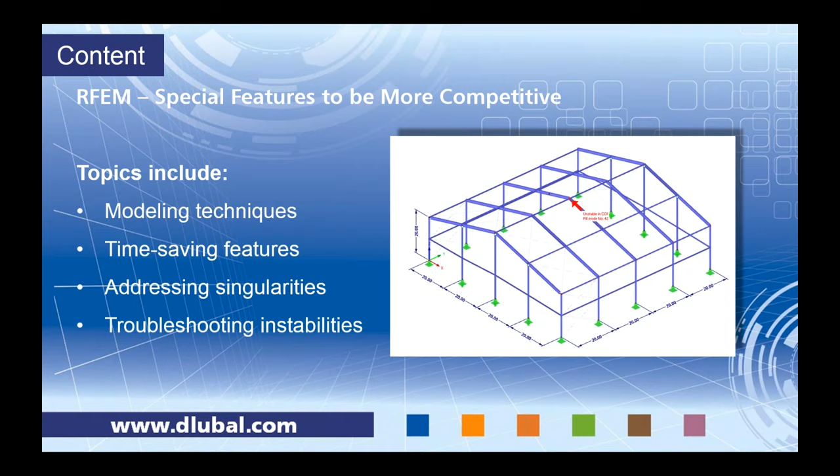I don't think there's a single engineer out there who has modeled that hasn't encountered an instability of some sort. So today I just want to show you some features in RFEM that I think help you troubleshoot these instabilities and to overcome them quickly.

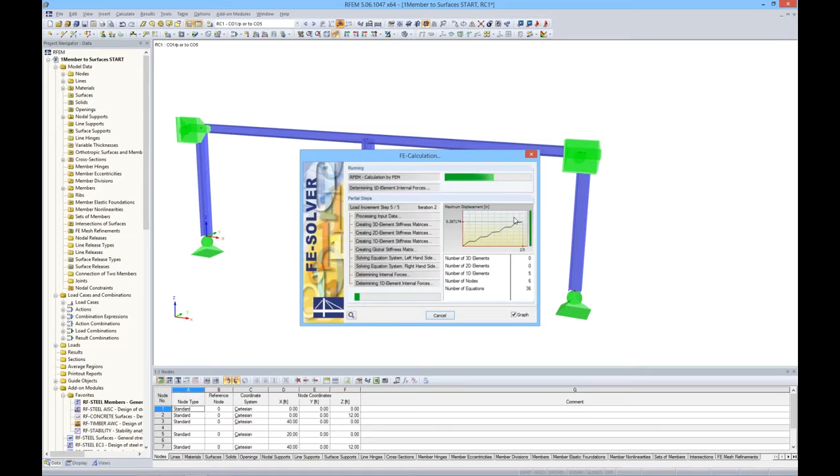So with this result combination, I want to go ahead and run an analysis. And it tells me that the results are not found, so it's going to go ahead and run through all of those load combinations. And if I take a look now, I have a results option down here at the bottom of my Project Navigator tab. So this is where I can actually control what I see graphically from my results. You can see here that right now I have my moments in the local Y direction displayed.

We have a max and a min, and I can scroll through all of my load combinations here, and it updates according to which load combination was shown. I can increase my member diagrams here just so you can see them a little more clearly. And we can take a look at our axial forces.

Maybe we want to take a look at shears. We have stresses here. The other thing I utilize in this model is we have, as I mentioned, quite a few add-on modules. So we have one called RF Steel Members, and essentially it's just a stress analysis of our steel members.

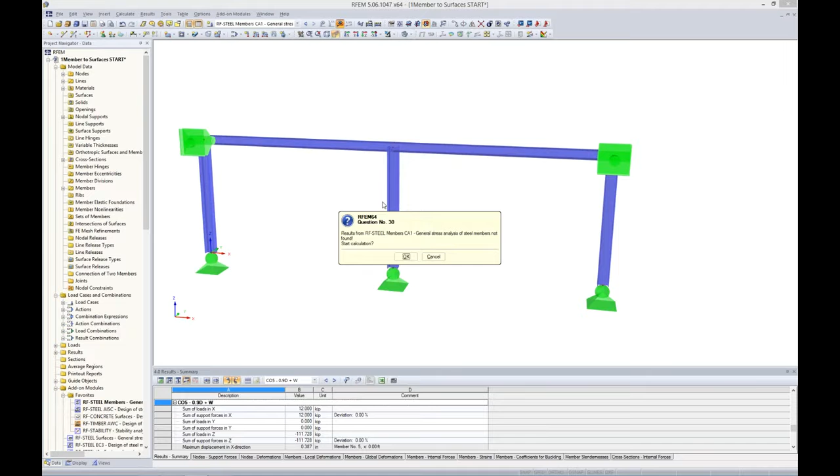I'm using the results from our result combination to get a stress ratio. You can see here that if I take a look at my colored panel list, my ratio is actually 1.11 at this intersection. So for design purposes, this obviously is not okay. We can't have over 1.0, and in some cases maybe it's 0.8, it's 0.9. You can see the rest of the beam is relatively okay, even at these other column locations at 0.75.

If I decrease my member diagram, we can really see clearly where the problem area is. It's right at this intersection. So we have a couple options here. We can certainly increase the size of our members, but this can result in an over-conservative design because the only problem area is really this intersection here.

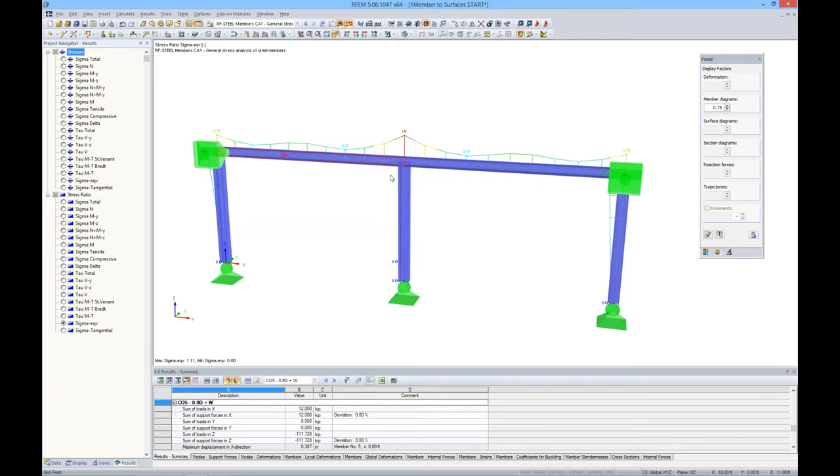So what I'm going to propose is that we maybe take a more detailed look at our intersection here with a finite element analysis. If I go into our wireframe view and turn off my results, we can see here that our members are just simply 1D elements. When you're drawing a member in the program, it will only be this line, which is the centroid of the section, as a 1D element.

I want to go ahead and divide this member here. So all I need to do is right click on the member, go to divide member, and I have a few options here, but I want to divide by the distance. You'll notice this arrow here is going from left to right, so we know where the start and end of our beam is. So I want to divide the member 2 feet from the end, and I hit OK. Now you can see that I have 2 separate members.

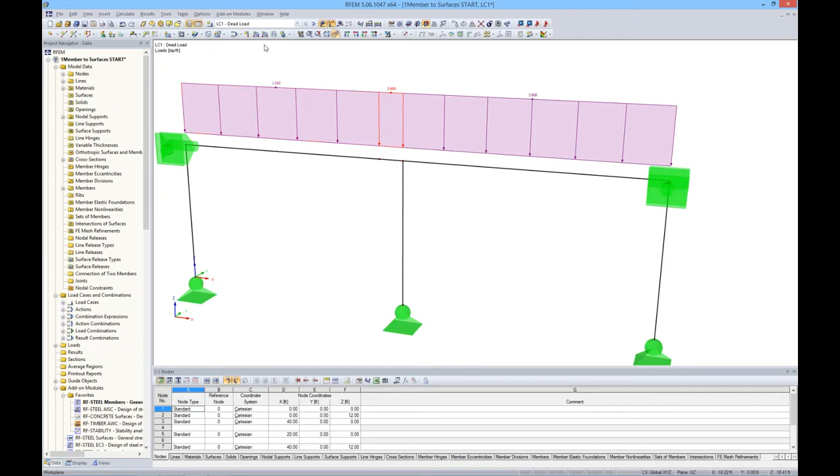And you might be thinking, okay, well what about the loads? What happens with the loads when you divide a member like this? But you can see that the loads were also divided, and the program's smart enough to know to keep that value on the divided member as well.

So we want to do the same thing with this one. I will divide the member by end distance. This time, because my arrow is going the other way, from start to end, I want to divide it from the member start by 2 feet. If I select this column and simply hit the enter key, the last dialog box will come up. So that's just a quick tip rather than right-clicking on the member to pull up the dialog box again.

And we want to go ahead. Now we have these 3 separate members right here. So I'm going to render it again, and I'm going to select these, and the selection is just similar to AutoCAD. If I drag from left to right, it will only grab what's in that box. If I go from right to left, it will grab everything that box touches.

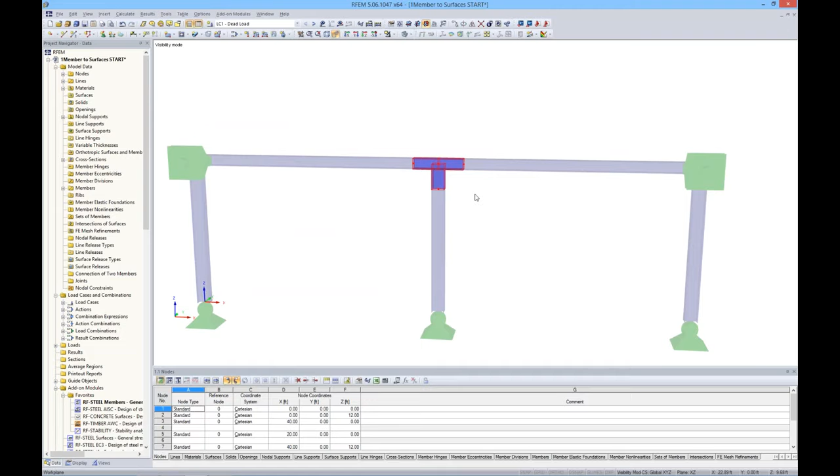So for this case, I'm just going to select here, and I'm going to choose visibility by selected objects. Now I can no longer select anything other than these 3 elements that I specified before. This is a pretty powerful feature that RFEM has that I haven't seen too often. If I select my 1D members, right click, and go to my member, I can generate surfaces from members. And now you can see, let me put it in the wireframe view, that these 1D elements are now surfaces.

So they're 2D elements now. If I click on the web for this surface, you'll notice the thickness is 0.38, steel A992. All of this is taken directly from the section that you specified, the W shape. If I select a flange down here, the thickness is 0.63 inches. So again, everything was taken from that W shape.

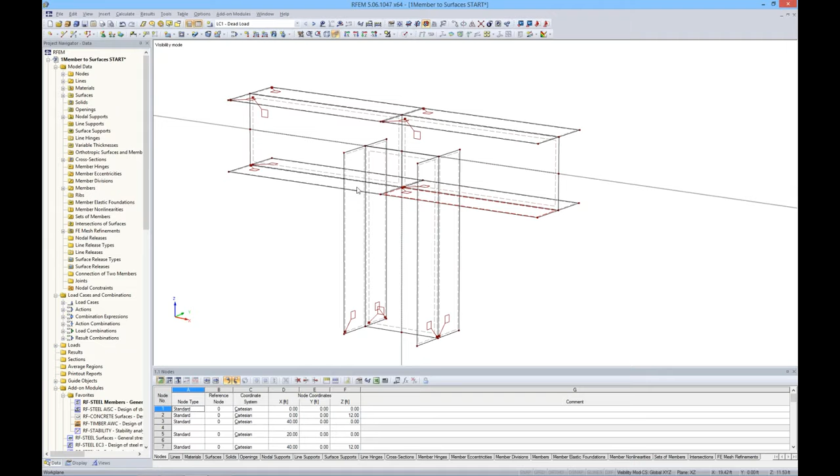So you might notice here that we have some geometry issues. Obviously, this is not valid. So we want to move the flanges of the column to the bottom flange of the beam. I'm just going to hold down my control button and select all of these nodes at once.

And I'm going to use our move copy tool. I don't want any copies here, I'm just going to be moving. Typically I would need to know what this distance is to move these flanges down to the bottom flange of the beam. Maybe after a little while I could decide, okay, half the depth, take into account the thickness of the flange.

But instead, RFEM has this tool where we can select 2 points to actually get a displacement vector. So if I select from the top of the flange down to the bottom of this flange, you can see I now have a displacement vector in dx and dz. We will not be moving it in the dx direction, but only in the dz. So I hit OK, and you'll notice that everything lines up quite nice.

Now, the other thing to consider is that we have this single point here where this 1D element is framing into the surface. This can actually cause a singularity. All of these forces are being transferred to this one particular point right here rather than being distributed over this entire surface. So actually what I want to do here is to create a rigid plate at the end.

For our surfaces, if you go up to this button up here, you'll notice that we have quite a few shapes that you can choose from. So we have donuts, semicircles, triangles, anything really that you'd like to do, polygons, and the program will create this surface element and automatically mesh everything. So there's no need to individually mesh the elements. Some other programs require you to tie nodes together, to tie elements together, but the program will do this all automatically.

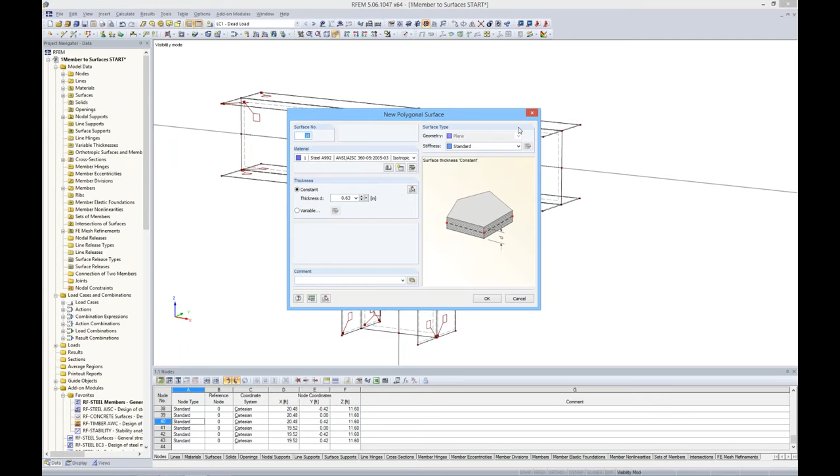So for this case, we're going to go ahead and choose polygon. And for my stiffness, I'm going to choose rigid. Everything's grayed out because our stiffness is super high. So here we will just go ahead and draw our plate. And once we close the loop, we can see that we have a new element here.

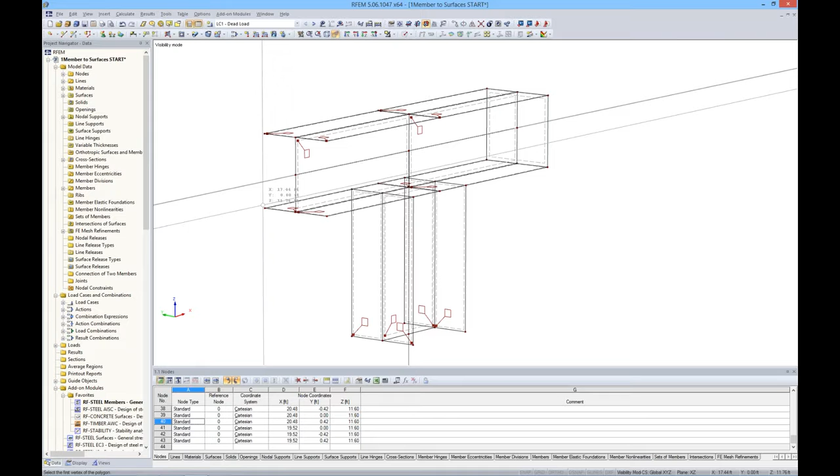We will do the same for this side. And lastly, we want to do the same on the bottom of the column. I right mouse click to get out of that dialog box. And you can see now that if I go ahead and render my views and turn off my visibility mode, that everything lines up quite nicely.

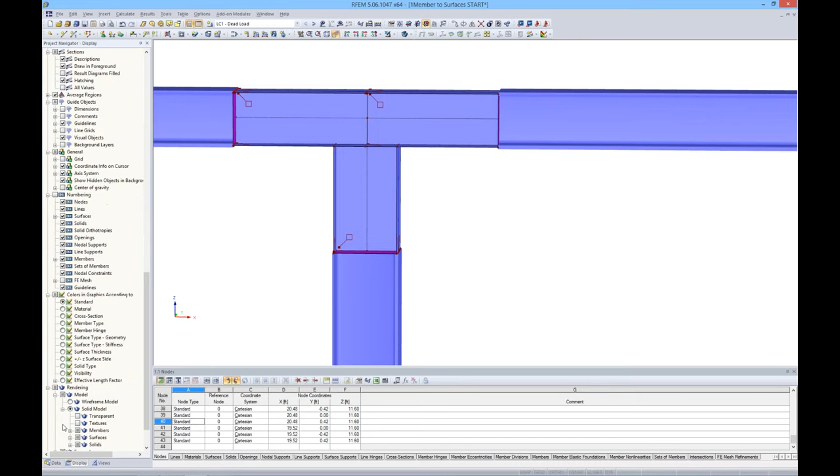Surfaces are only modeled at the center line of the thickness. So we do have the option in our display menu, and this display menu is essentially everything that you'll need to adjust your graphical view. If I scroll all the way down to the bottom, I have the choice for rendering here, the model, the solid model, surfaces, and I can actually fill including the thickness. And then if I zoom in, you can see that everything lines up with the 1D element to the surfaces.

I will go ahead and turn that off. And now the other thing I want to show you is the FE mesh. You can notice that the program has automatically inserted these refinements. For the sake of this purpose, I'm going to go back to our data and go ahead and delete these.

Now, if I go to calculate FE mesh settings, and I think most people are familiar with this with an FE analysis, that you have to specify your length of your finite elements. Default is typically 1 foot. If I go ahead and generate that 1 foot, we can see that this is clearly too large for this situation. We only have one FE element for the entire width of this surface here. So if we go to calculate FE mesh settings and change this to 0.1, regenerate the model, we can see that this is much better.

Again, the program is tying all nodes together, all lines, so you don't need to worry about that. Okay, so one last thing to consider is our loads.

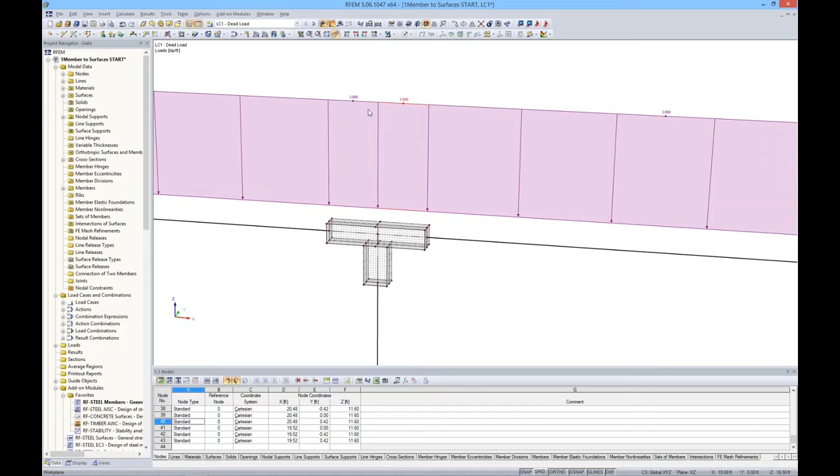For our dead load, as I mentioned before, we kept these two member loads, but in this case we don't have a member here anymore, we have a surface. So we need to delete these - I just click on the load and delete them - and I'll apply a line load instead. A line load is very similar to a member load, except it can be applied to surfaces, for instance.

So here we want to apply -3 kips per foot. I simply zoom in and click on my lines, and now you can see that the 3 kips per foot has been added.

I want to adjust my live load. If I hold down the delete key and click on each load, that will also delete those loads. Again, I want to draw a line element, and because I'm in live load up here, that is the load case this load will be generated into. For this one, I want to specify it as -2 kips per foot. Again, I just zoom in here, and we have our loads. Okay, so I believe we are ready to run our analysis.

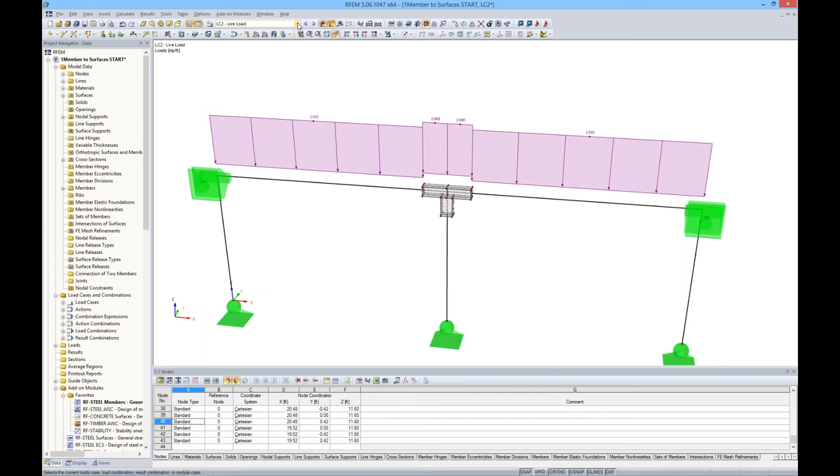I want to go to my result combination again, and I'm going ahead - it's asking if the results are not found, and up pops our dialog box. This will take slightly longer than our 1D elements because we now have the 2D surface elements. You'll notice it's simply going through each iteration as the load increment increases as well.

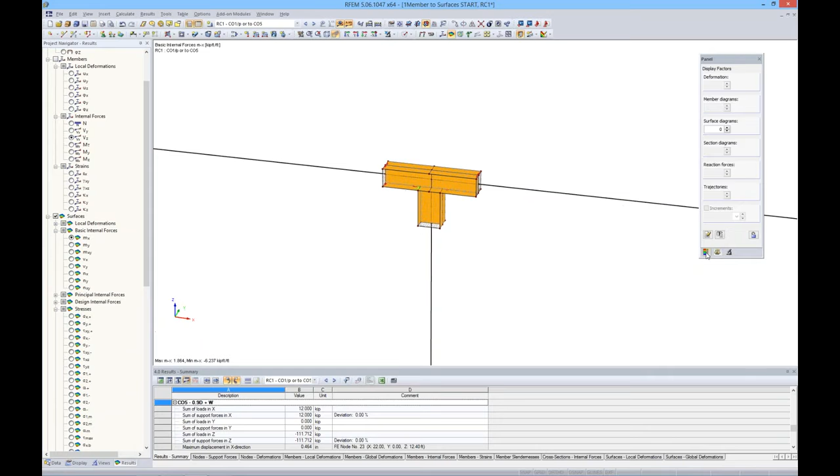So instead of the members, you'll notice that the member diagram stops short of those surface elements, which is fine. I'm going to turn that off, and I want to take a look at our surfaces. If I scroll in here, now I can view all of the different internal forces for the member - shears, moments, everything of the sort.

What I'm really interested in is the stresses, so I go ahead and view the von Mises stresses. Everything looks okay until I zoom into these points - we can still see that it's extremely overstressed.

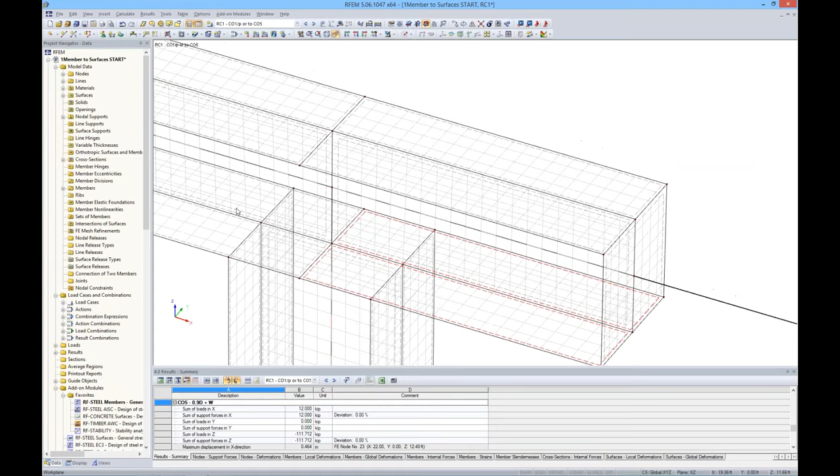So we have an option here where maybe we want to add a plate to this bottom flange, maybe an inch plate. If I turn off my results and hold down control, select this surface, I can select all of these bottom flanges. Now I can right click.

Oh, sorry, I lost it. Let me go ahead and do that again.

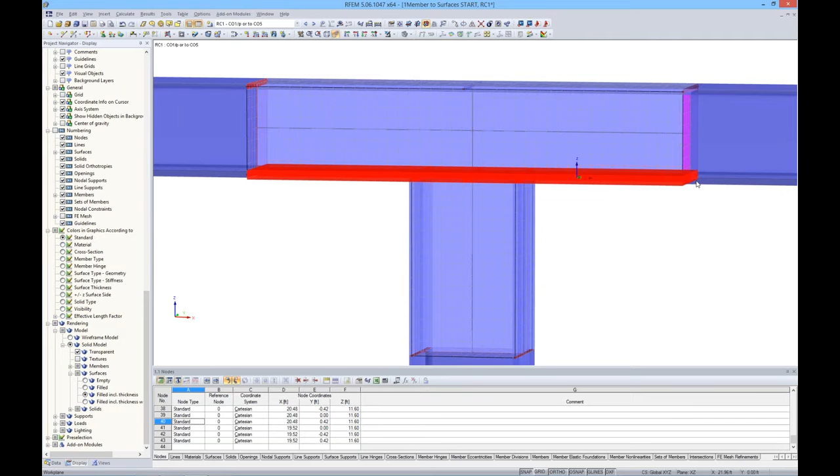Okay, now I can right click, edit surface, and let me increase my thickness to 1 inch. In the rendered view, we won't see that unless we change it to the thickness under our display options, and you'll see it's slightly thicker than our 1D element, which is exactly what we want. I'm going to change it back to here.

Now, the other option is to do a plastic analysis. With our add-on module, RF-MAT NL, which takes into account nonlinear materials, we can select all of these, right-click, edit our surface, and we want to create a new material.

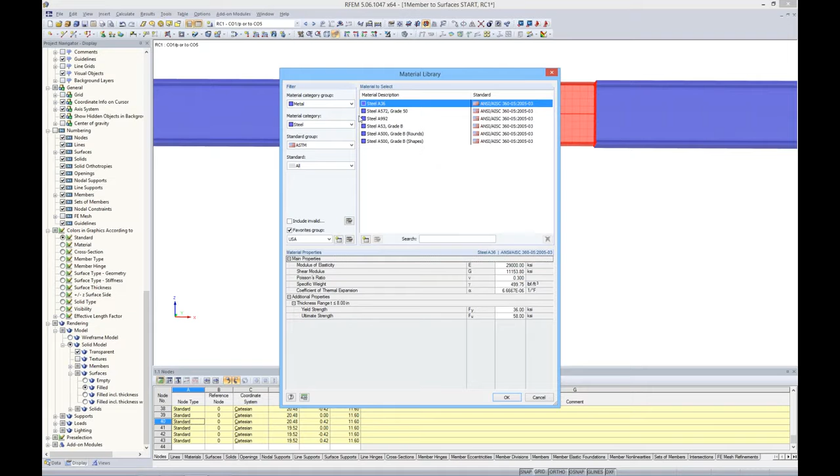So I go into my materials dialog box, and you can see the library is full of quite a few materials. We can filter them according to metal, steel, ASTM, but more importantly we have this favorites group option, where you can save the ones you use most often. For me, I created one for USA, and I'll use steel A992.

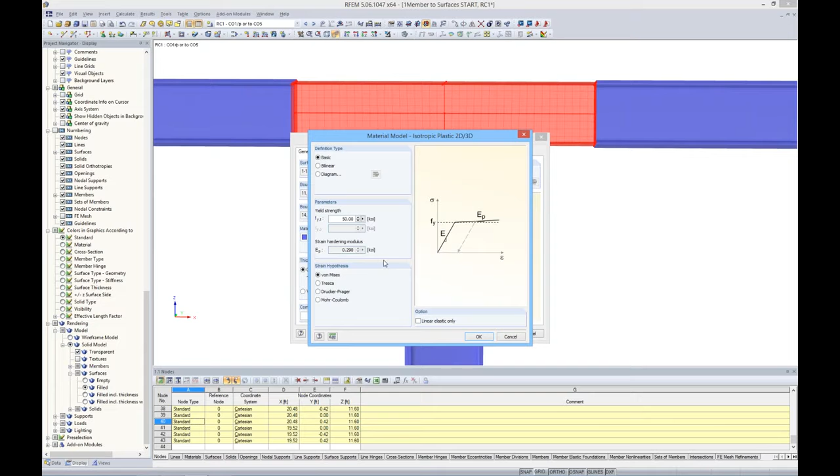Now, the material model default is isotropic linear elastic, but for this case I want to use isotropic plastic 2D, 3D. Up pops this other dialog box - you can see our stress strain diagram, our yield stress here at 50 KSI, which is automatically filled out, and our strain hardening modulus. So here I can click OK. Everything looks fine with that.

I hit OK, and I hit OK once more.

And I zoom out, and if you're not quite sure if the material is different than the rest of them, you'll notice here that I'm actually in my table down here, and I have this steel A992, which is isotropic linear elastic, and as I highlight the field in the table, the members themselves will actually highlight as well. This blue one just means that it's not being used currently. And then the steel A992, plastic 2D, 3D, you can see that those were actually applied to here.

Okay, so I want to go ahead and run my result combination again. And again, this will take slightly longer than the last one because now it's a nonlinear material. And keep into account the size of your mesh also matters for your finite element. At some point, the smaller mesh you go is not going to change your results. So what I would suggest is to keep a mesh that doesn't create a super long solve time, but will obviously give you the accurate results. You'll notice that if you decrease the mesh size and solve again, your results won't change by much.

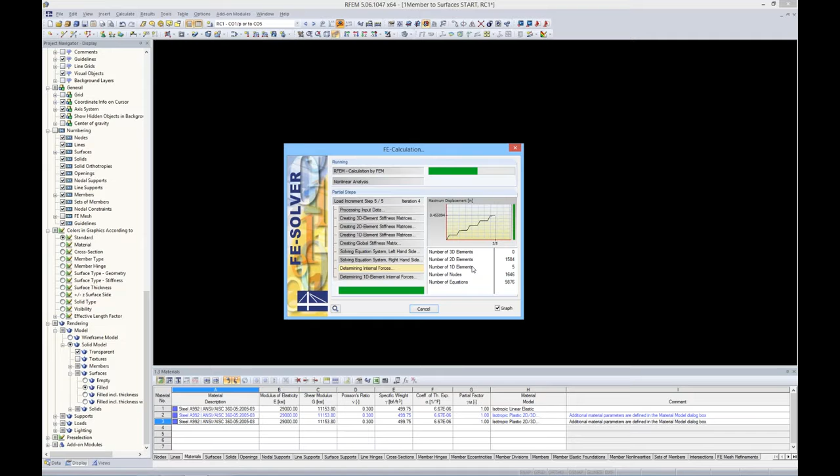We also have this graph here that shows the maximum displacement as the program is cycling through each iteration. So as soon as this is done solving here, which will be just a second longer, and again, it's just because we do have a nonlinear material. Now I want to take a look at these contours. Each FE element actually has a value at each corner. And what the program is doing is using a smoothing algorithm to tie all of those values together and to create a nice smooth diagram.

Under my display tool, and I scroll up here to my results, I actually want to choose constant on elements. Now what this is going to do is actually average out the 4 values for each FE element. Then you can take a look individually for each FE element. And you'll notice that nothing exceeds 50 KSI, which is our yield stress, which is exactly what we'd expect.

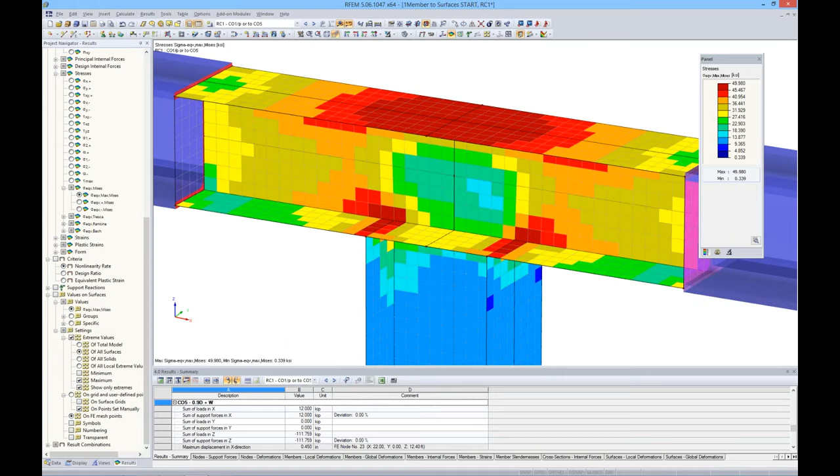I think an important thing to show you here is that we have an option under results called criteria. And this criteria will actually show us our FE elements that are in their full plastic state at 1.0. These other 2 green ones are obviously somewhere in between 0 and 1 as the ratio, and then the other elements have not reached that state yet. So that simply concludes our first example.

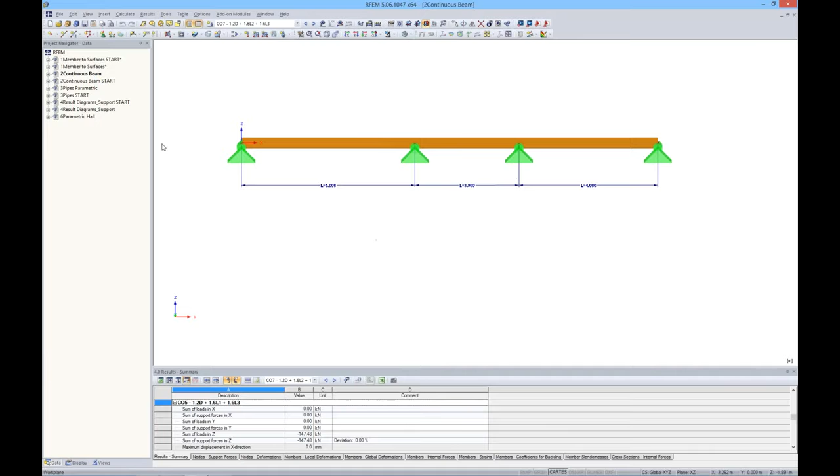I want to go ahead and move on to our next one, which again is very simple. It's just a continuous timber beam, 3 spans, nothing too special about it. But actually what's going on behind the scenes is quite powerful. And the purpose of this example is to actually show you the use of parameters or parametric modeling.

So if I go ahead and go to edit parameters, and I move this dialog box down, with parameters, you can actually define a variable in the program and then use these variables in an equation to change the span lengths, to change loads, to change angles. There's quite a few options, which if I show you here, we can change areas, angles, surface thicknesses. So I'll get into that in just a minute.

But if I go ahead and type in 2 meters here, and then for my B length, which would be my second span here, I'm going to go ahead and type in 5. And maybe for my C length, I'll go ahead and type in 3. I hit apply, and you'll notice that everything is updated. Supports moved, and I also want to show you that if I go ahead and look at my dead load, everything was adjusted with the loads as well. We have separate live loads on each of these spans, and those were all updated as well.

Now let's say I want to edit my live load to, let's say, -2 kilonewtons per meter. And I go ahead and hit apply. You'll notice that now the live load was updated. So you can understand the benefit of using parametric modeling for a company that maybe creates a lot of the same structures, but of course geometry is changing slightly, maybe some loads are changing slightly, but overall you can use the parametric modeling to deal with structures that are very similar to just improve your efficiency.

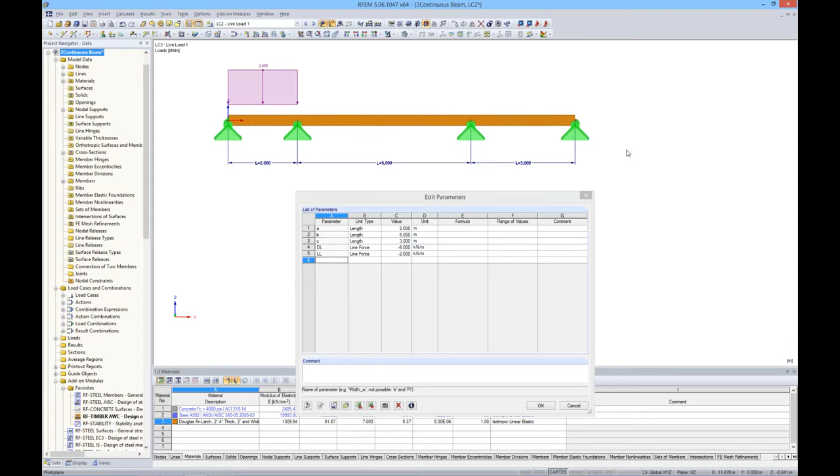Now, the other thing I wanted to show you is, again, I created quite a few load combinations from the ASCE 7. If I take a look at my result combination, it's asking me, do I want to go ahead and run the calculation? Yes. So this is just finding the max and mins of all those load combinations.

And now I want to take a look at my support reactions. You'll notice here that as I scroll through them, of course, my support reactions are changing according to the different loads that I have. Now, I want to show you guys our print report option, including these parameters. I think that RFEM has quite powerful print report options in comparison to a lot of other software that I've used in my design career.

If I go ahead and open up a printout report, and I created one previously shown here, a separate dialog box will actually open. You'll notice here on the left is our table of contents, or report navigator. I can click on these and our report will actually update according to where I am over here. Now the same goes for here. I can keep scrolling down and the table of contents will also update over here.

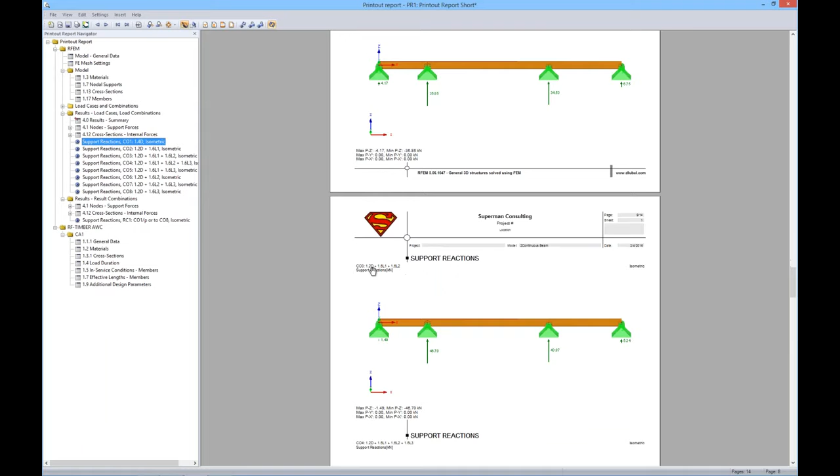And I went ahead and put in some pictures here of our support reactions. And you can see this is reflecting our spans that we currently have, which is 2, 5, and 3, I believe. And they're for each load combination. If I go ahead and zoom in here, I can see load combination 3, my support reactions, my max, my min. Everything has nice headings. It's very clear. But let's say, oh, okay, well, my beam just changed all of a sudden.

So I'm going to exit out of this print report. No, I don't want to save it. I'm going to open up my parameters, which down here in my table under my first model data tab is a quick link to my parameters. And let's say I want to do 5 meters, 2 meters, and 3 meters. I hit OK, and then you can see that everything was updated. Now, I want to go ahead and run the results again. And I go back to my print report.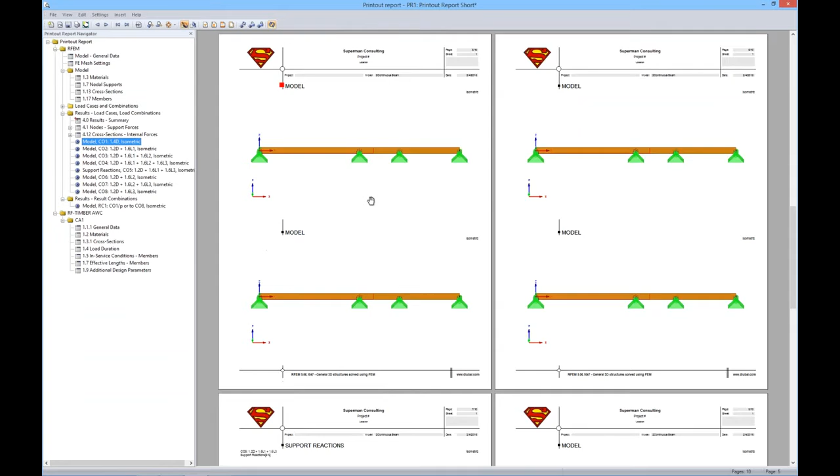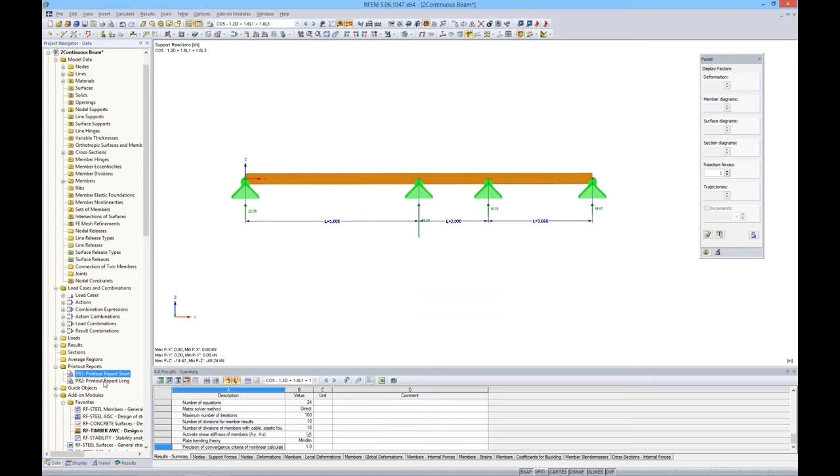And now I want to go ahead and jump down to these pictures, and you can see, well, it looks like we are missing our support reactions. Well, regardless, I think that we can see from our results here, we have the support reactions shown, and it should go ahead and update in our printout report. I'm not quite sure why, but regardless, the geometry is taken into account. And everything in the print report will be adjusted according to the changes that you just made here.

I can go ahead and showcase this a little bit further with the printout report by taking a look at our members. I'm going to turn off my support reactions, and I just want to view my moment about the y-axis. Of course, as I scroll through, oh, that was probably the issue. I didn't run a result combination. So again, this is just an envelope solution of all the load combinations, and I think that's why the print report didn't show up, because I didn't run all of them.

I can go ahead and scroll through each load combination for the moment about the local y-axis. I go ahead and increase these. And let's say I wanted to print off this moment for each load combination. Typically, you would have to take a picture or a graphic, insert it into your PDF print report, go back, change the load combination, do the same thing. But we have an option in here called mass print. If I go to my print option, graphic printout, I see the mass print here.

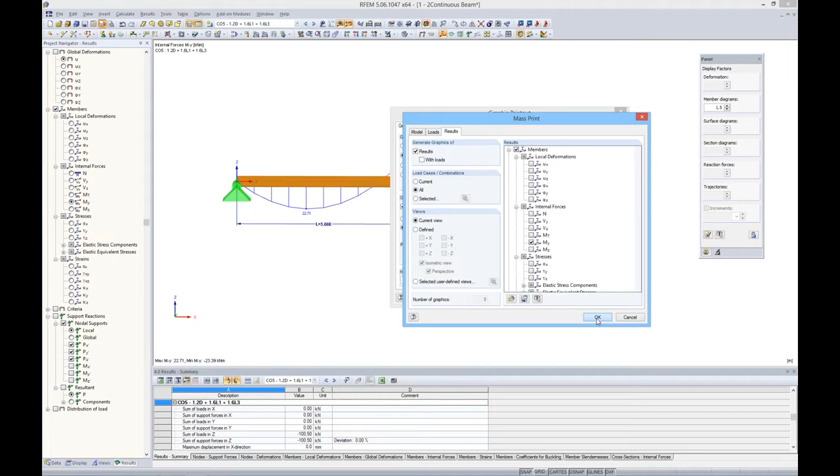Now I can hit these settings right here, and I have 3 tabs that pop up: model, loads, and results. I'm currently in results, and the program knows that I'm looking at the moment about the y-axis. But for my load cases and combinations, instead of the current one that I'm in right now, I'm going to select all. I hit OK, and now the program's cycling through each load combination for my moment about the y-axis, and it's going to insert those into this print report automatically.

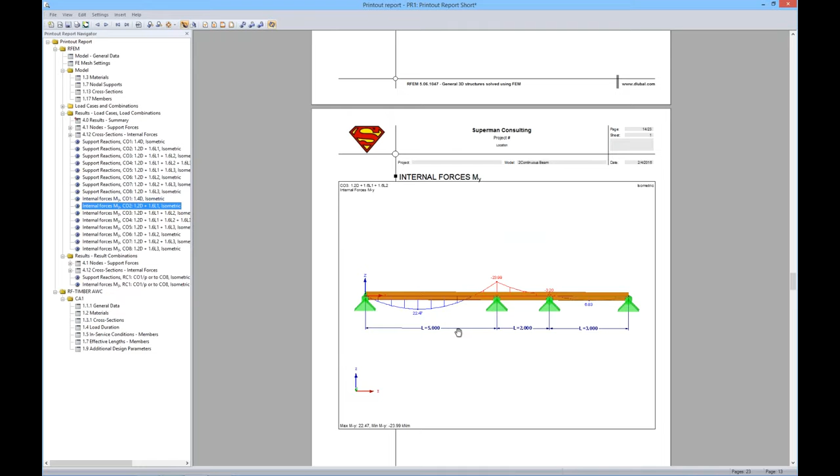So you can see now that my support reactions were updated. I just needed to run my result combination. But if I scroll in here, I can see that now I have my load combination 1 with my moments, and it shows my max and my mins. Scroll down, load combination 2, load combination 3. Everything is done automatically. So I think you can imagine how much of a time saving that is when you can use this mass print option.

Okay, so the question is, with parametric modeling, how do we actually incorporate these parameters into a model? So for the sake of time, I have already created this simple beam, and I've applied some loads on it just according to dead load and live load. And I want to go ahead and edit my parameters.

Now if I type in A for my first span length, the length automatically pops up and we'll just do 3 meters. B for my second span length, we'll do 5 meters, and C for my third. Now you notice nothing in the model is changing right now. I'm just simply defining what parameters I want to have in the model. And we'll go ahead and make this one 4.

Now let's say we also want to consider dead load. Now instead of length here, I actually want to go down, and this is where I told you before there's quite a list to choose from for the amount of parameters you can actually define. Precambers, moments, stresses, time, mass, percent. So we have quite a powerful option here when it comes to parameters.

For this case, I'm just going to go for a line force, and I will go ahead and do -4 kilonewtons per meter, and maybe my live load, again a line force, and I want to do -2. Okay, so now that we have our parameters defined, we need to actually apply them to this model.

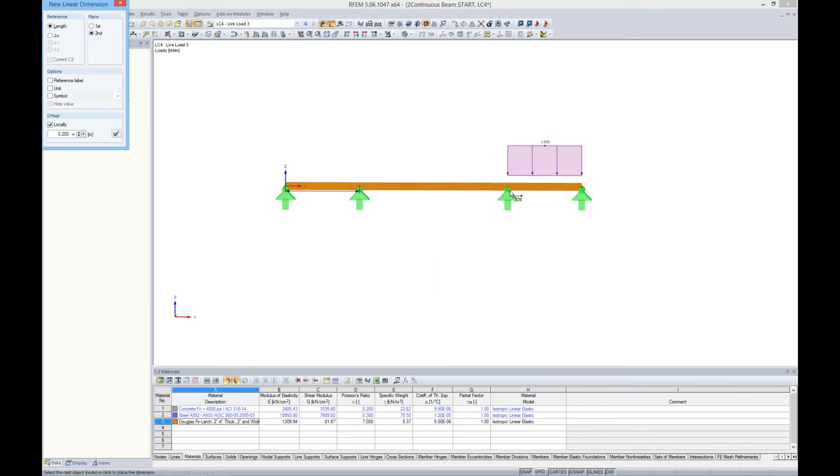Before I do the other ones, I want to go ahead and just quickly add some dimensions to this. And just like AutoCAD, you can just click on each node and bring down the dimensions. Let's say I want to add my unit. And now I can see visually the span length between these different spans.

I go ahead and do the same thing to this node. It's set at a static 9. I want to edit my formula, and I'll do A plus B. And now, again, it's dependent on those parameters. And lastly, I want to do this one, and I will go ahead and edit my formula, A plus B plus C. Okay, so everything is now dependent on my A plus B plus C.

Now we also need to do the same thing for our loads, and we can go ahead and highlight all of these. We right click, edit member load, and we can go ahead again the same way that we defined those node coordinates. Instead, here for the load parameters, for the actual value, I can use this arrow, edit formulas, and choose my dead load. I hit OK, and now that dead load is dependent on that parameter.

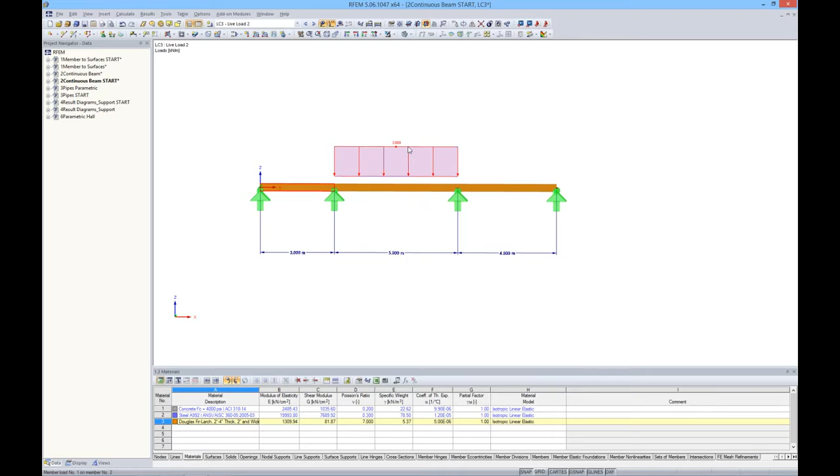Now we just need to go ahead and do the same for each live load. And so instead of dead load, I'll go ahead and choose live load here, hit OK, and I do the same for each span. Edit my formula, add my live load, hit OK, and lastly I have this one.

Okay, so now if I go ahead and move this up and I open up my parameters, I change this to 2 meters, 3 meters, 6 meters.

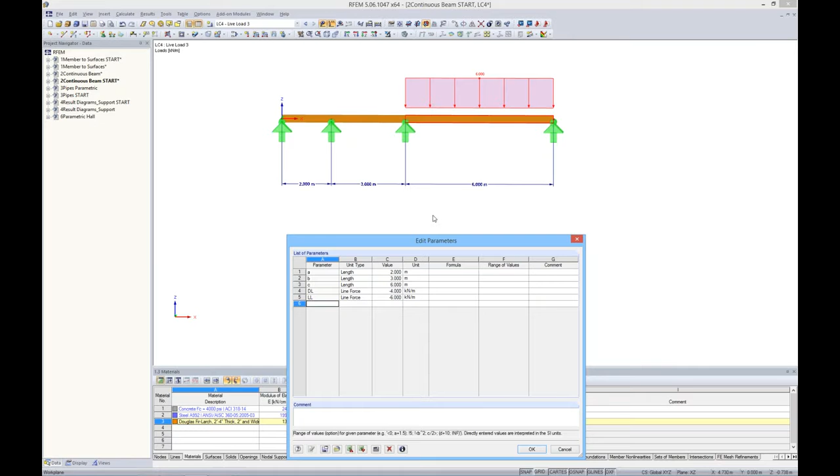We should see that everything is updated just fine. For our live load, we'll go ahead and choose -6 and apply that, and everything is updated. So you can see that this is obviously quite valuable, again, for a lot of the similar structures that you're working on, or maybe it's the same structure and there's a lot of changes going on within the design process.

So that sums up that simple model. So we'll go ahead and move on to the third one. This one is a little bit more complicated FE analysis with our surface elements. And I also created this model to have parameters in it as well. So you can see here I've defined my parameters, my angles, my loads within my pipes, which you can go ahead and define a pressure load within this pipe and maybe the spacing between.

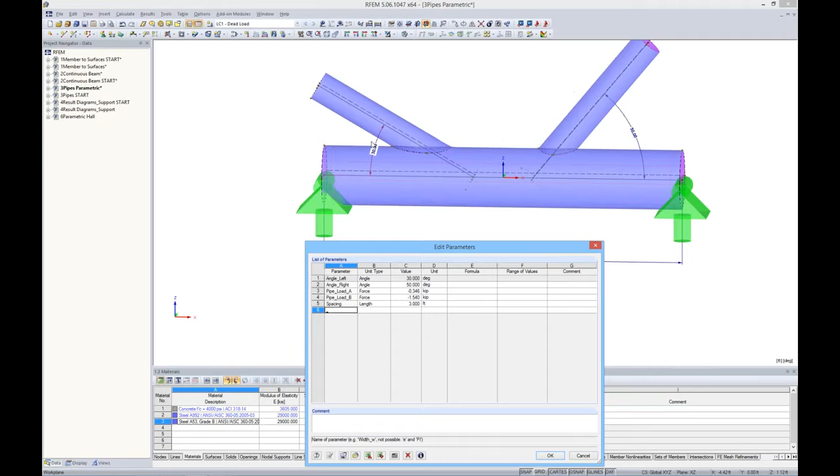If I go ahead and change this to 30 degrees and I hit apply, you'll notice that this pipe automatically changed to 30 degrees here. One thing to take note is that this is an intersection of surfaces. And you'll notice that when I change this to 30 degrees, everything was updated. There's no need for me to change my FE elements. I don't need to go back and change the geometry. The program's smart enough to make all of those changes as I go ahead and adjust the model.

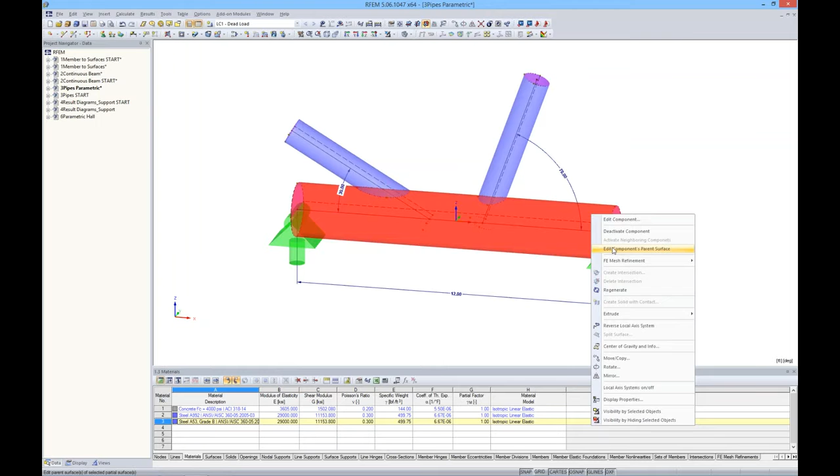I can show you guys again, if you take note at this 50, I can go ahead and change my angle right to, let's say, 70 degrees. And I'll go ahead and hit apply. Again, everything is updated automatically. I even have the ability to click here and right click to edit the component's parent surface. And we have a pipe option here.

And I can change my radius to 2 feet. Again, everything is automatically updated. Those surface intersections are moved up and everything looks quite nice. We can do the same here. Maybe make this radius a foot, hit OK, and again, everything looks okay.

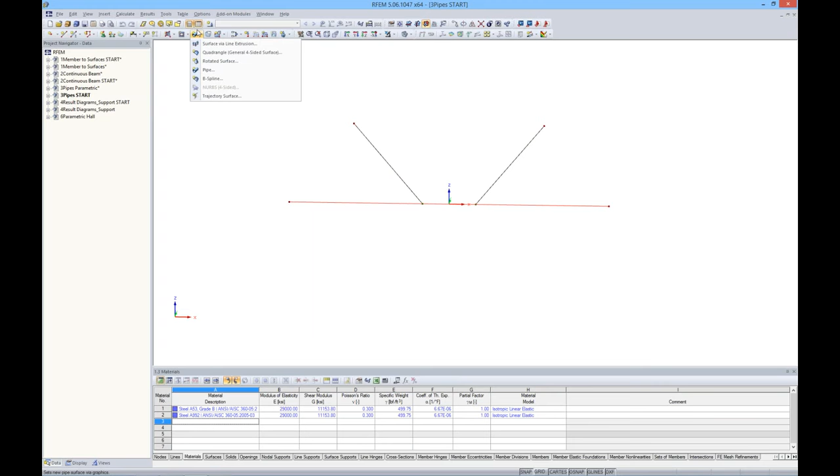So I want to show you guys how to go ahead and create this model and create an intersection of surfaces. So I'm going to go ahead and open up this beginning model, and all of these are just line elements. They're not members, they're just simply lines in the program. I can define maybe members out of them if I wanted to, but in our case, I'm going to go ahead and apply a pipe surface. So I'm using these quick tools up here, and you'll see there's an option for pipe.

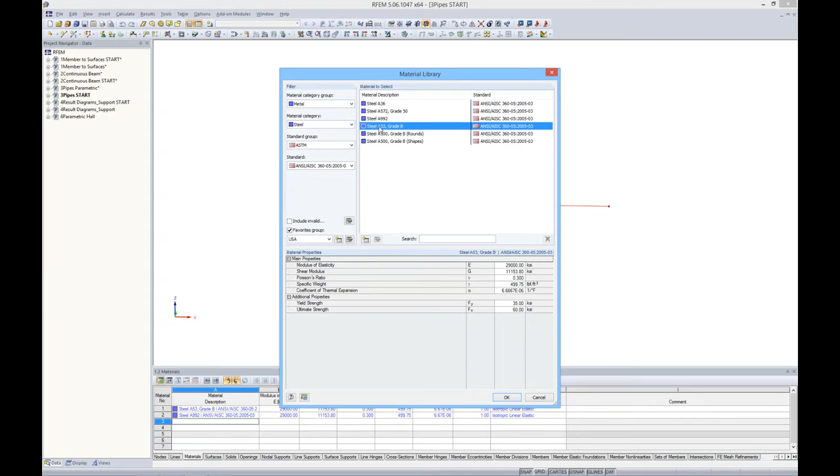Maybe my material when I first open it up is something like concrete, or maybe it's even timber, just something not applicable. So I can go in here to import a new material from my library. And again, for even metal, steel, ASTM, we have tons and tons of materials. I want to utilize my favorites group again, and I'll just go ahead and choose my steel A53 grade B. My thickness for my pipe, we'll just go ahead and set that to 0.6 inches. And now we need to go ahead and click on the pipe tab up here and choose our radius, which we'll just do 1 foot.

Now you'll see that the program automatically applied it to this line because I had it selected when I went into that dialog box. I want to go ahead and do the same for these two elements. So I can go in here to my pipe surfaces again. And again, you can hit the enter key and it will bring up that same dialog box, which is a little bit time saving. For my thickness here, I just want 0.2 inches, and my radius, I'll go ahead and set it at 0.5 feet or 6 inches for these smaller strut pipes. Then all I need to do is just click on those lines and everything's created.

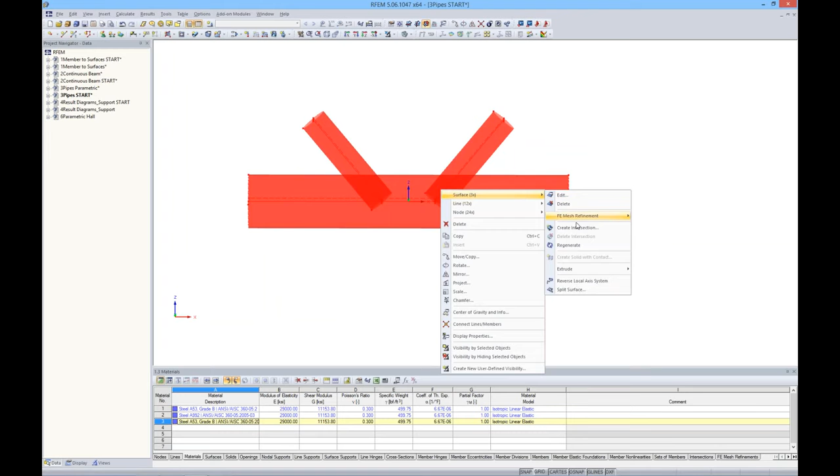Now, you'll probably see that we have some issues with our geometry. Same thing as the first one, we have some intersections here that we need to take care of. So what I actually want to do is to select everything, and I'll right click, and from my surface, I want to go ahead and create an intersection. And the program will automatically intersect all of these surfaces that I have selected. Now they're all just surface elements, but again, we need to take care of this geometry.

So I'm back in my data navigator for this model, and I can actually go to my surfaces here. And if I expand my surfaces and I click on them, you can see as I scroll down the list that it's actually highlighting each element that I'm clicking on in the graphic view. So we get to this component right here, and we do not want to consider this in our analysis. Typically, this would not be a realistic situation. So we can right click here, and we can actually deactivate the component.

You'll notice here that it says inactive, and it's gone from our solution. I can go ahead and do the same thing for this one, deactivate, and I also have the ability to activate it again. But for right now, this is exactly what we want.

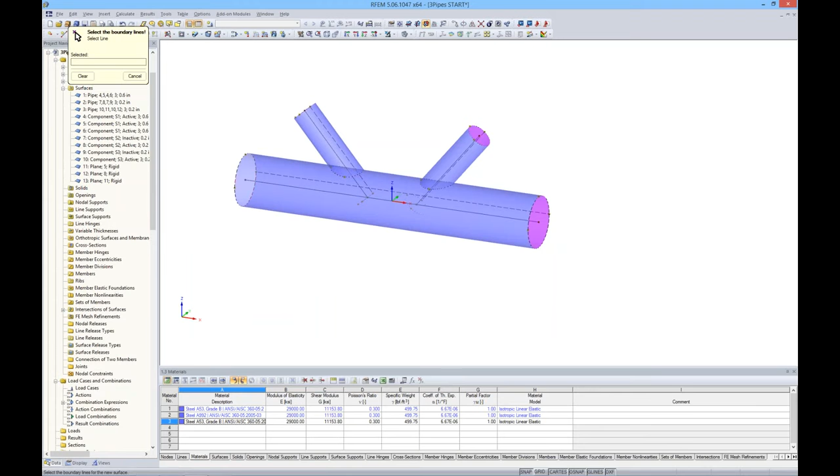Now, just like the first model, we need to go ahead and create some rigid end plates here. Instead of the polylines, I'm going to go ahead and select a boundary line. I want to go ahead and select rigid here, and all I need to do now is simply select these circles. So you can see how easy it is to apply surfaces in RFEM, just the click of a button. I can right click to exit out of that.

Now the next thing that I need to do is to go ahead and apply some supports. So I'm just going to click on new nodal support. Maybe I don't know what this is, so I want to go ahead and create a new one.

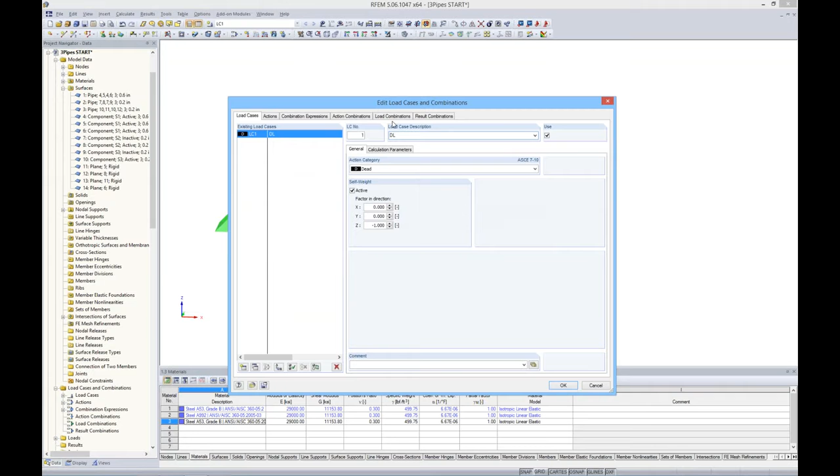So lastly, I want to just create a simple load case. Let's just do self-weight, so I'll call this load case description dead load, and I just want to activate self-weight. Now we just have this single load case, and we can actually go ahead and view our results by running the combination. Actually, I forgot one thing I wanted to mention.

Let me clear these results. You can see right here that our FE mesh is not ideal, it's too big, and you'll probably find as you decrease this that your results are going to change. So again, when I go to calculate FE mesh settings, the default is 1.0. For larger structures, this may be completely adequate, but for a smaller model like this, let's go ahead and change this to 0.25, and we'll regenerate our model.

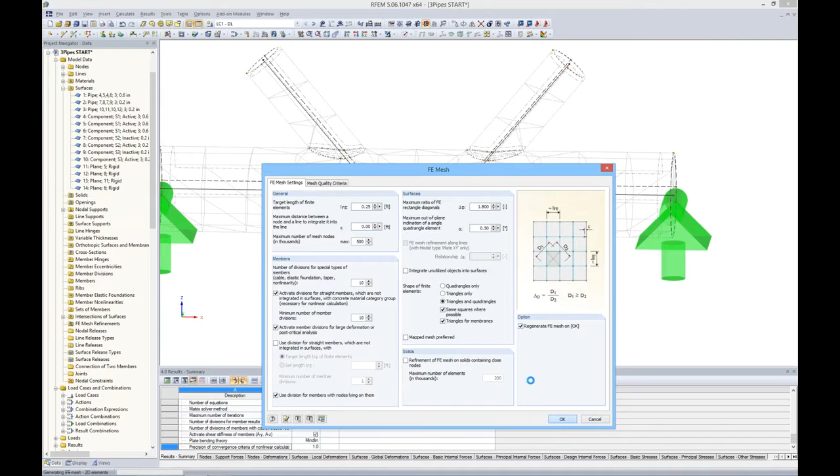And that looks quite a bit better. You also have the ability to go ahead and add an FE mesh refinement, let's say around this area, around a line. What that will do is actually decrease your mesh size only around this area without decreasing the entire model, which can significantly save on solve times.

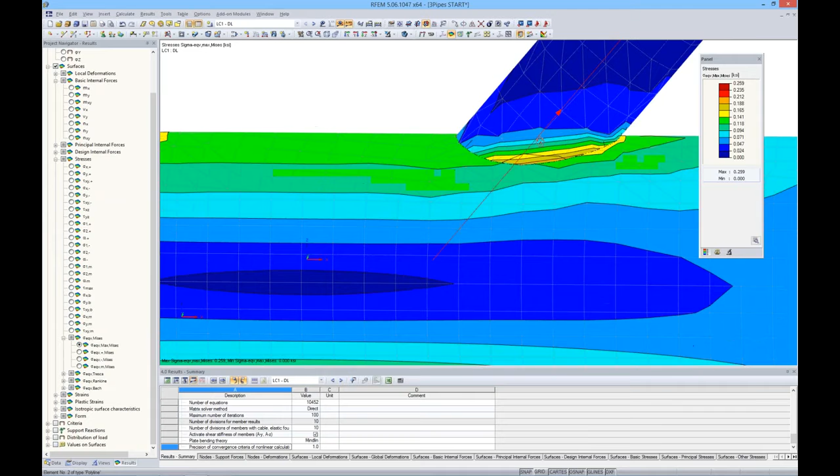So let me go ahead and run that analysis again now that we have a better mesh. We're only running dead load, so it should just take a second. Now we can see that we are viewing our von Mises stresses for the pipe. Again, similar to the first example, maybe we have some higher stresses here that we want to address. We can certainly view our deflections, which is actually only 0.001 because it's only self-weight.

So I'm not going to do the parametric modeling because we went over that in the last example, but you can see how powerful surface elements are in RFEM and how easy it is to apply them.

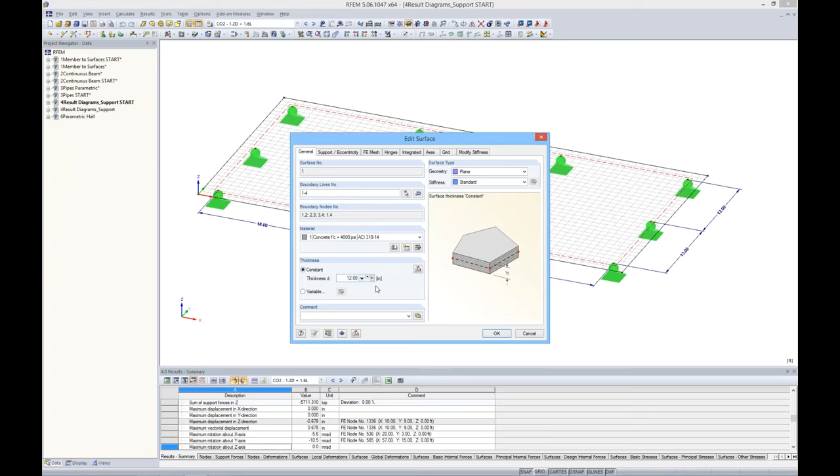Okay, so moving on to our next example is just a typical foundation. It's a concrete foundation. If I go ahead and double click on it, I've defined it as 4,000 PSI concrete. It's 12 inches thick, you know, maybe a foundation or an elevated slab, something of the sort.

I also have applied a few loads here, just your typical dead load in KSF of 1.5, maybe a live load of 0.75. And then I also have a couple load combinations here according to ASCE 7. Then I also have the result combination for the envelope solution.

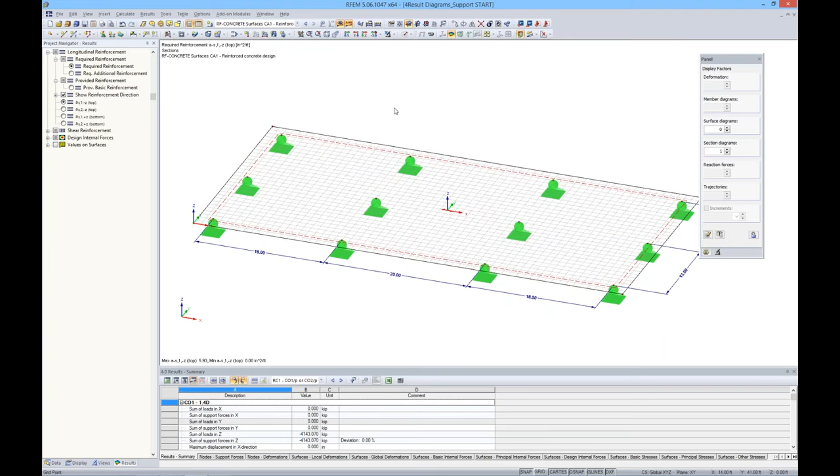Now I've also utilized our add-on module RF Concrete Surfaces. What this will do is actually tell you your reinforcement that's required according to whichever load combinations you choose. I went ahead and ran RF Concrete Surfaces according to my result combination because I want the max internal forces to be used for the design of my reinforcement. So I can go ahead and solve here, and I already had them saved. If I go ahead and look at my ISO bands, I can see here from my RF Concrete Surfaces, I'm looking at my required reinforcement.

I can zoom in. Everything looks okay except for these nodal supports, they look a bit high. Let me go back to my result combination.

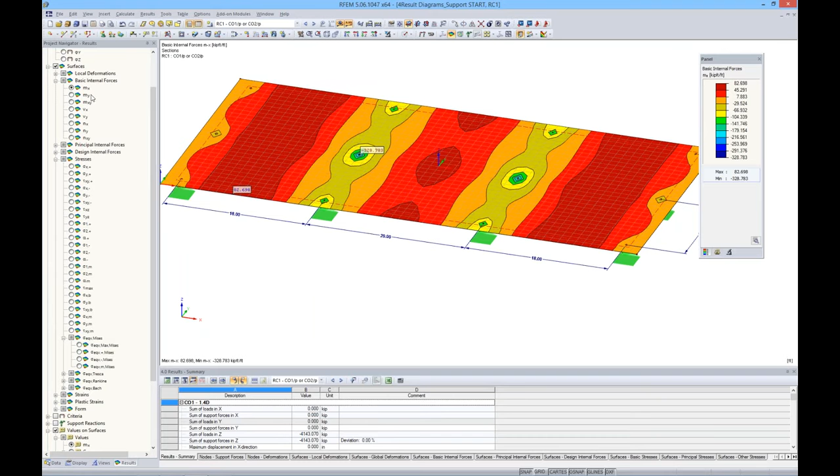I'm looking at my surfaces, let's look at MX. You can see there's much higher moments at these locations of nodal supports. MY shows the same thing. Taking a look at our stresses, there are very high stress concentrations at these locations, and this was a situation of a singularity, essentially, that we want to address.

If we don't address this, we will have a much too conservative design for our reinforcement. So let me go ahead and turn on my grid, and my grid settings are down here. I can just snap that on.

I can right click and hit edit, and I actually have my grid set up right now to dynamically adjust according to the size of the model, so it'll just move with me as I am doing my modeling.

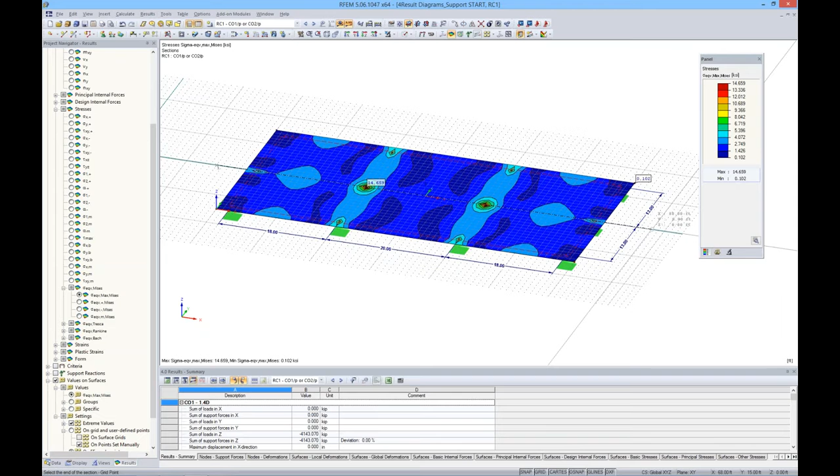We have a feature up here called define a section for results diagram. If I click on it, I want to define a section right down the center of this where those nodal supports are, and up pops this results diagram. This is just a section cut right through where I defined it, and you can see that my values are changing as I'm scrolling over the length.

Right now we have deflection shown in inches. Down here are my stresses. Maybe I want to view the MY - you can see that everything is significantly high right here at this nodal support.

So this is the singularity option that we want to address. Up here, I can scroll through my load combinations, and I want to take a look at maybe my required reinforcement. We're up near 5.93 inches squared per foot at these locations. Everything else is relatively low, so we do need to address the singularity.

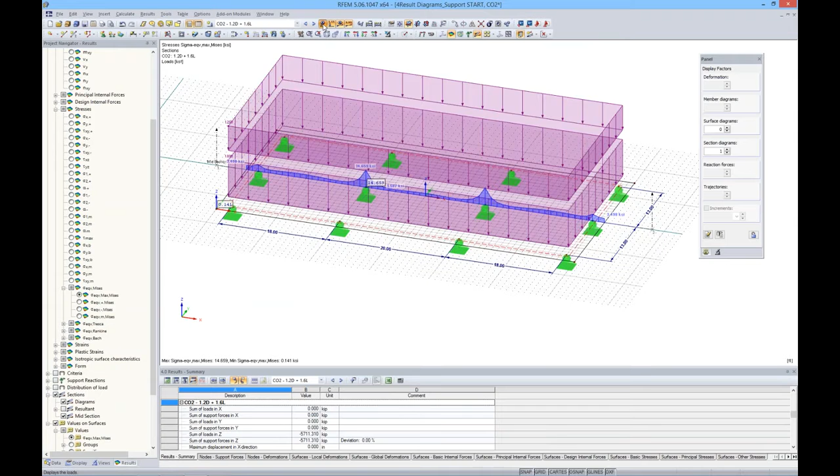I'm going to go ahead and save this section as midsection so that once I exit out of here, and I'll turn off these contours, now I can view my results as this saved section. I can scroll through load combinations to take a look at anything that I want to view here.

So how do we deal with these singularities? We have a couple options in the program. The first is we can actually consider a column support here with the correct spring stiffness to distribute the load to all the surrounding FE elements here.

So rather than just all of the load being placed on these single elements or these single node points, we can actually distribute the load. I think this is a pretty cool feature of RFEM that I haven't seen too often, but we can actually go here to a new nodal support. I'm going to go ahead and create a new one.

Instead of using these definitions down here, I can create elastic support via column in the Z direction, and up pops this edit column dialog. I have three options here: an elastic surface foundation, where you can see our springs are being tied to the FE elements, an elastic node support tied to a single node, or a node support where it adjusts the stiffness of the FE elements as well.

For our case, we're going to use an elastic surface foundation. Let's say our column or our pier framing into it is circular with a diameter of 24 inches, and let's say I want to define this column height as 7 feet, with support conditions at the column base as rigid.

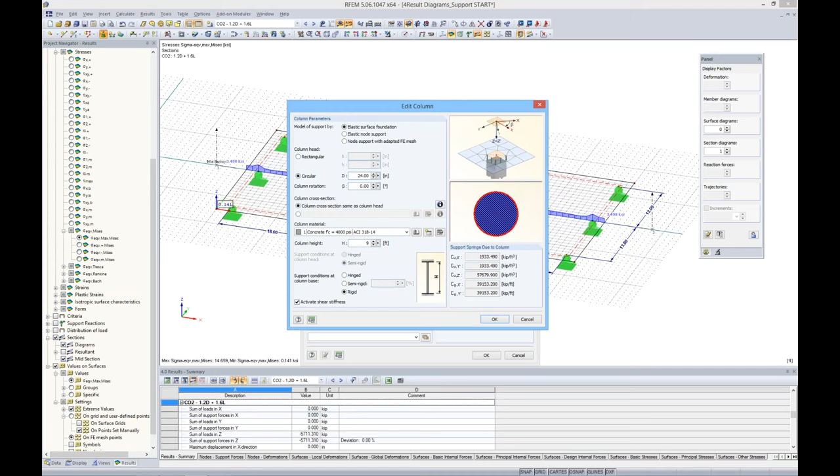Now you'll notice here that everything has updated according to the stiffness, the spring stiffness, and these parameters that I've entered. It's based off 4,000 PSI, so as you change this, you'll notice that the springs are actually changing as well.

If I go ahead and hit OK, it's asking me if my FE mesh will be cleared, do I want to continue? Hit OK once again. Now I can apply this to here, and you'll notice it looks slightly different - it has a radius here so that we're actually applying those spring stiffnesses to that support.

Now, if I go ahead and run my load combinations again, this will actually be running the concrete add-on module to take a look at my required reinforcement. We can see it visually here. Let me go ahead and turn off my grid.

If I go ahead and select midsection here, I right-click and go into my results diagram. Now we can see that it is undefined. We're only defining our reinforcement up to the surface of that column, up to the face of that column, which makes sense. This is typically what you would do.

Now we can see that the surrounding reinforcement required is much lower, but we're still looking at this singularity on the other node, which is exactly what I wanted to show you guys, how much our required reinforcement has decreased. I want to scroll back to our results combination. Again, deformations don't really matter, but our stresses are significantly lower at the face of the column as compared to the single support.

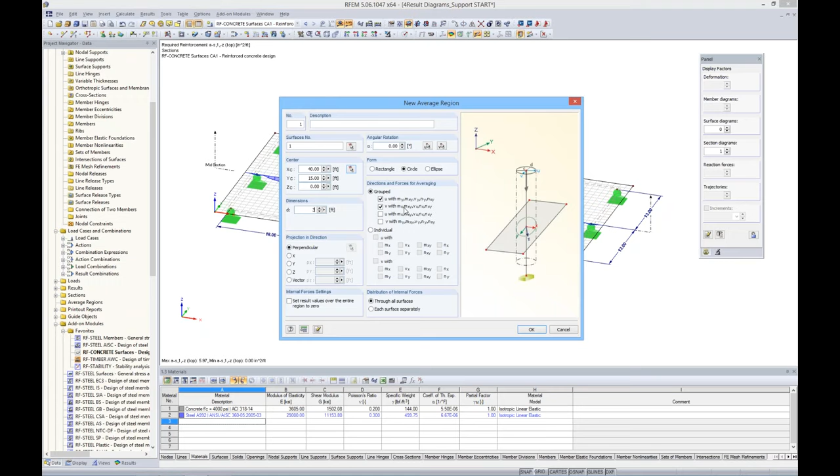I want to do this point support here. Maybe I want it to be circular, and the dimensions to be, let's say, 3 feet in this case. Now what it's doing is averaging out in both the U and V directions, which we have a nice picture here to show us exactly what all of these mean. All of our internal forces will be averaged out within this 3-foot radius.

I go ahead and hit OK, and I want to solve once more. You can visually see here that our average region is shown. So now we can see that our reinforcement is down to 3.64 inches. Again, we can go to our result diagram and see that has been reduced. It's still higher than this other one because we aren't defining anything at the face of this column, but it is significantly lower in comparison to where we were.

We can go into our RC1 and take a look again at our von Mises stresses. Sorry, I have this other one shown here, but you can disregard that. Much lower than what we were looking at before. We can also go ahead and add in our MX, much lower than what it was before.

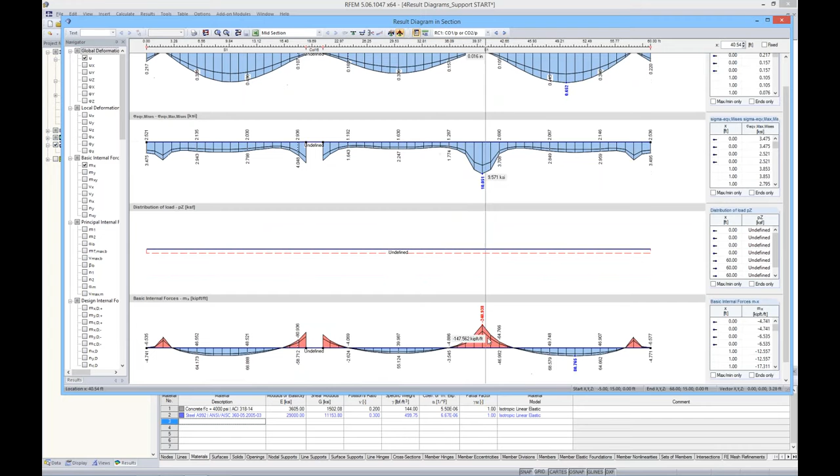The other quick thing I wanted to show you, if I turn back on my grid here, we have a powerful feature in RFEM called drag and drop. Let's say I wanted to copy this section over to here. All I need to do is highlight it, push down my control button, and now I just drag it and drop it.

And now I have another section here. Let's say I want to go ahead and do the same over here. Now I have 3 sections. You can go ahead and run one of these load combinations, and now you can see I have these sections at all of these locations.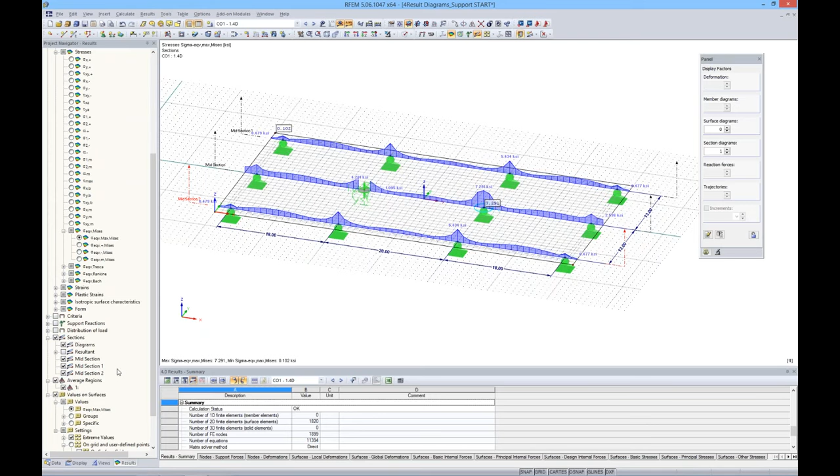What I wanted to show you was that essentially drag and drop can be used for anything. Let's say I wanted to move this support here, or maybe the edge of this surface. I can simply do that, it's asking me if I want to clear my FE mesh. All I need to do is drag out the corner of that surface element. So you can understand that's a pretty powerful feature instead of using the move option.

You can also click on something, hold down the control key, drag and drop it, and it's just a copy. You'll notice that my grid went ahead and expanded with it. I can do multiple elements, hold down my control key, and move everything over to here. All the dimensions and everything move as well, but you can understand how much of a time saver that can be rather than using the copy move tool every time.

So lastly, I want to move on to our last example, and we will go ahead and open up this Parametric Hall.

It's a simple hall, and to let you guys know, we have this under Tools to generate model members. You can create quite a few different structures here. The continuous beam I used for one of our examples earlier, though I didn't showcase it, but it's possible to do continuous beams, and more complex 3D frames, 3D halls can be created. If I click in here to create a 3D hall...

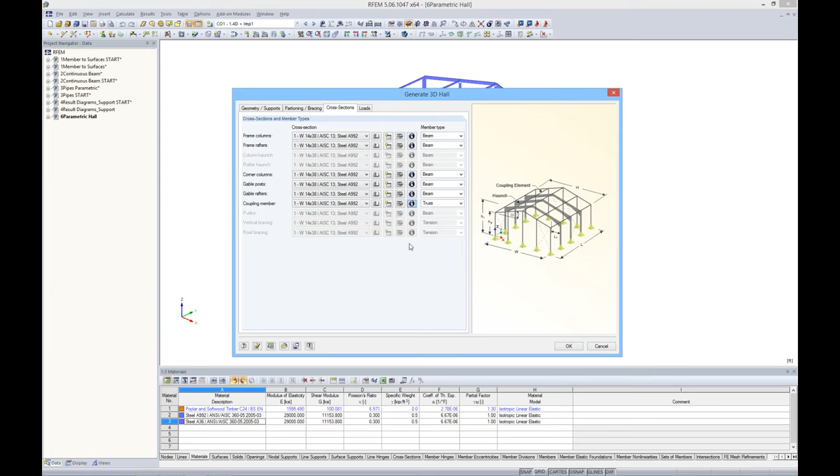You'll notice that I can define all my geometries. It's laid out very clear here in the picture. Any bracing that I may have, I can define my cross sections, and I would hit OK, and my 3D hall would be created. This one is also based on parameters.

Let's say I wanted this to be 15, and maybe another 15. And I go ahead and hit apply. The FE mesh will be cleared.

Everything adjusts quite nicely. Let's say I want the angle of my roof to be a little bit higher, let's say 25 degrees. And I go ahead and hit apply. Now the roof angle is changed. So again, just another use of those parameters.

I'm going to go ahead and undo this. Okay, so with this Parametric Hall, I went ahead and added in some simple loads.

Again, we have our dead load. Now we have some snow loads on here, and I used our snow load generator. If you go to Tools again, generate loads from snow loads, duopitch roof, ASCE 7.

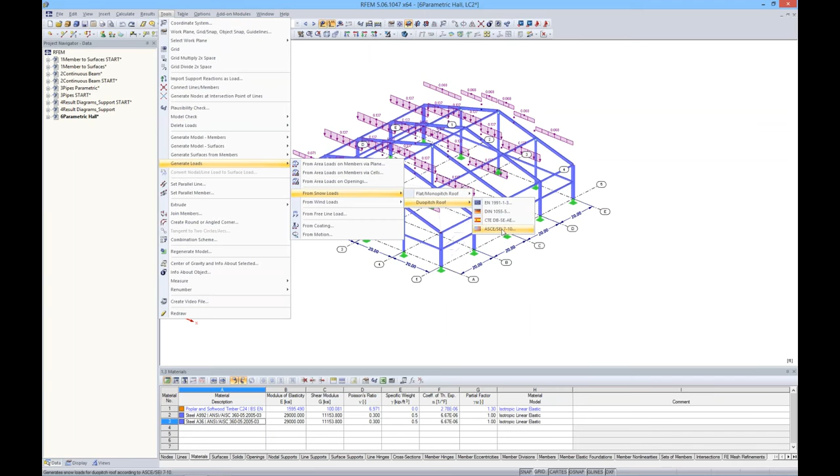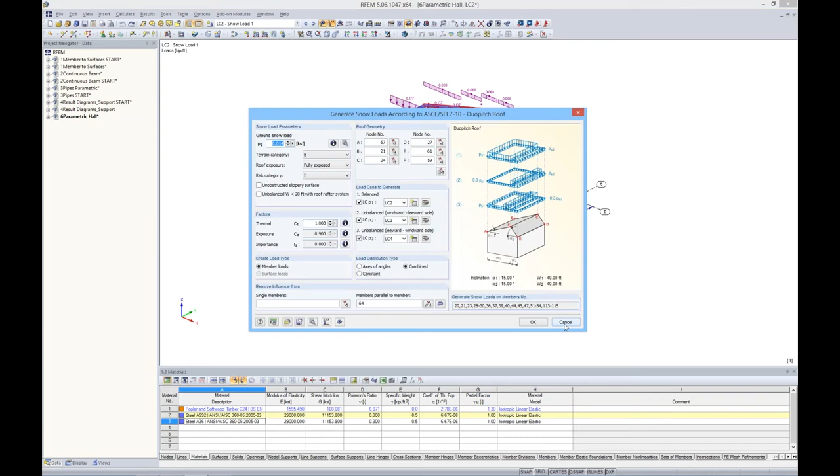Now you can see all I need to do is just define the roof geometry and then the factors from the ASCE 7, and the program will go ahead and create 3 load cases: balanced, unbalanced, and unbalanced. It will automatically put them in as load cases into the program, which is what I did here. I have LC2 snow load 1, here's snow load 2, here's snow load 3.

And then I actually put in some imperfections here. Imperfections can be used for out of plumbness, maybe we have a pre-camber, and I just wanted to showcase this to you guys to let you know that it is possible to take all of these into account. They are dependent maybe on the normal forces in the program, and everything is done automatically. You just need to define your inclination and your pre-camber.

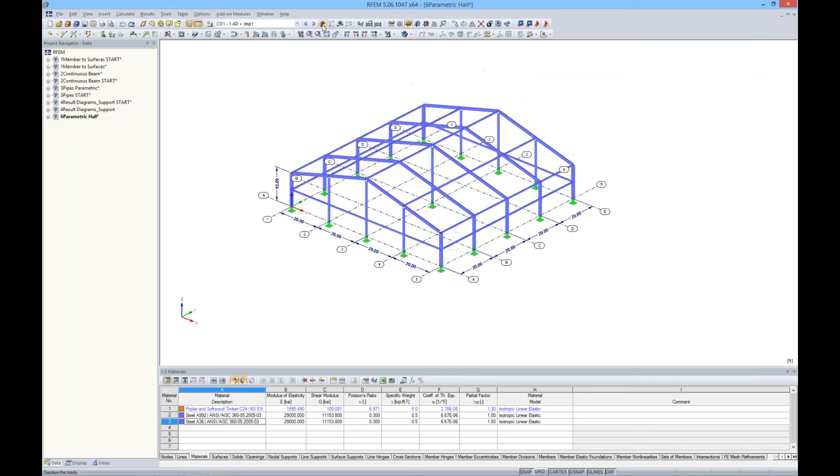I have my load combinations here according to ASCE 7, and it includes all of these imperfections as well. So let's take a look at this first load combination, and it's just 1.4 dead plus my imperfection. I go ahead and run it, and it begins to run, then all of a sudden I get this instability.

It's an error message, and as I mentioned, we all have seen these. However, down here in this explanation, it tells me the specified load is greater than the critical load. What's really unique about RFEM is that there's actually a big red arrow telling you where this instability is taking place, which can be extremely helpful for large models. So it's telling me that my specified load is greater than the critical load. I say okay, now I need to go ahead and address this.

So with load combinations, everything is run according to a nonlinear analysis and taking into account p-delta effects. But for load cases, they are run as a linear analysis. Only load combinations will go ahead and apply those p-delta as a nonlinear and adjust that stiffness matrix.

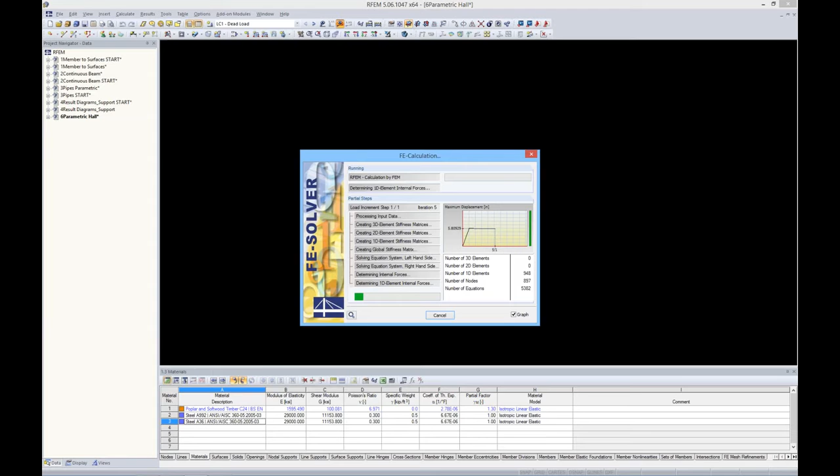So for load case 1 dead load, I want to go ahead and run it just to make sure that maybe my geometry is okay, I don't have any nodes not connected. And I go ahead and run it, and everything runs fine. You can see here that I have my results diagrams pop up for my moments about the local y-axis.

So, okay, it has something to do with those secondary effects. So what I want to utilize here, which I mentioned to you guys before, is we have all of our add-on modules down here under our data page, quite a few options to choose from. I added a few here to my favorites list, and what I want to utilize today is RF stability.

So if I go ahead and open up RF stability, this will actually show you the eigenvalues graphically of the behavior of your structure.

Even if you can't solve it like I just showed you with that instability, we can go ahead and show the behavior of the structure and also the critical load factors that you can multiply your applied load by before you will see that buckling behavior. For this case, I want to go ahead and set my eigenvalues to 4. And the load case that I chose is just my dead load.

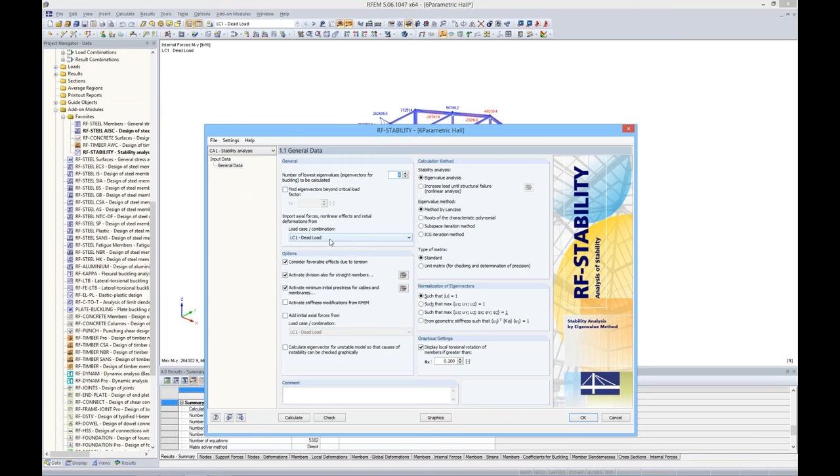There's quite a few other options in here. I don't really want to get into it today. It's a little bit more complicated. So we'll just go ahead and calculate. Now the program is still in this add-on module, and now we can see that we have our critical load factors for the 4 eigenvalues. This is purely interpretation, that the applied dead load I can multiply by 1.17 for this eigenvalue before it reaches its buckling behavior.

If I go ahead and go to my graphics view, and I want to take a look at my first eigenvalue, and I go ahead and play this animation, well, we can see that this column here is buckling out of plane. Let's take a look at the second one, and the whole structure is racking. If we take a look at our third one, it looks to be that column again, buckling in the other direction. And lastly, for our fourth eigenvector, still the problem column.

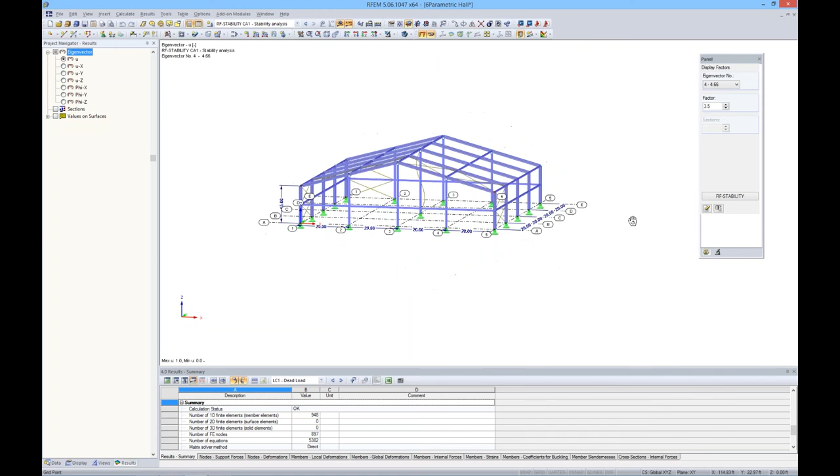So what we want to do is to go ahead and address these columns in here. Let me go ahead and turn off this mode, and I go ahead and select all of my columns in here. I hold down my shift key to make sure I've selected all of them down here, and I right click and I go to edit my member. Essentially most things that you need, if you have something selected and right click, there will be most of your options. So for this one I want to go ahead and edit my member.

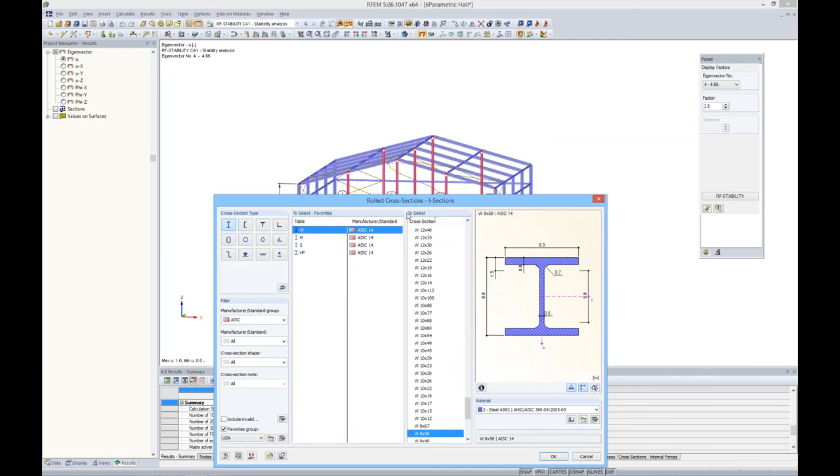I see that these columns are a W8x58, which is extremely small. So maybe we want to consider increasing the section size. So I can just go ahead and modify here. And I'll again modify my shape here. And it brings up all of our cross sections. I have my favorites group activated, so I'm only looking at the AISC shapes. And let's say we want to go ahead and select a 10x68. Still A992 is fine. We can always modify that here as well.

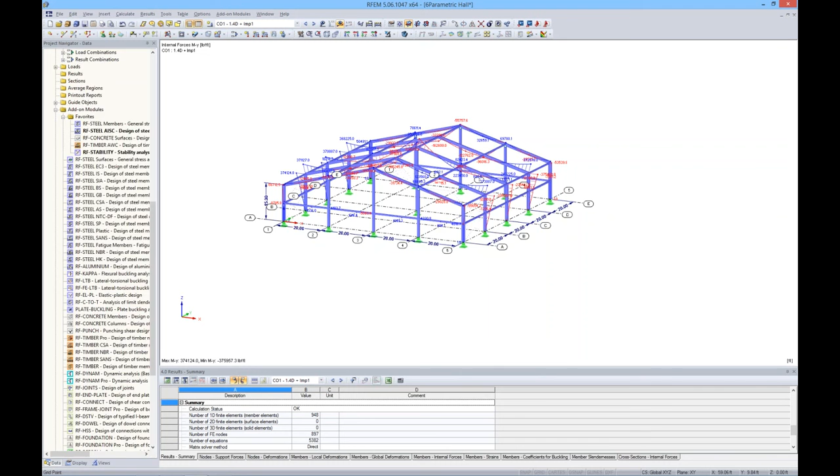I hit OK. OK. Do I want to clear my results? Yes, I do. And I hit OK once again. So now I'm going to go ahead and run load combination 1 with this new section size. And you can see now that we are getting results. So again, RFEM can be really useful in pointing out where exactly that instability is occurring. Not only that, it can be used for a stability analysis with RF-STABILITY to show you your eigenvalues and your critical load factors to address the buckling behavior of any members that you may have in your model.

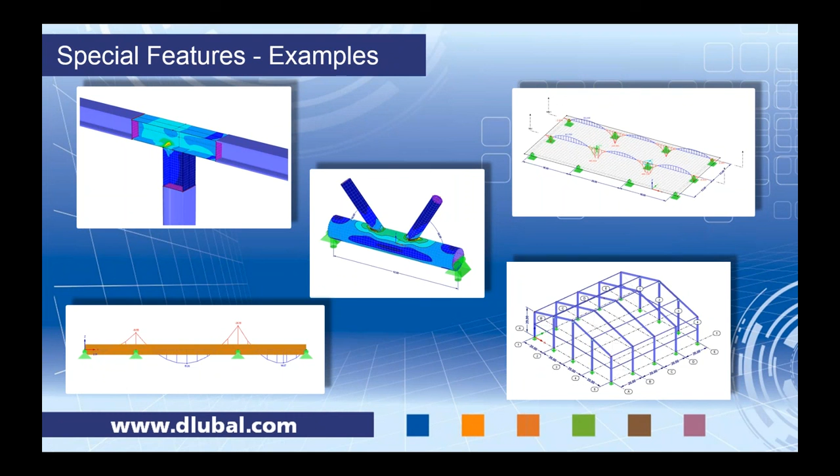Okay, so that is the end of our presentation today, and we went through these 5 models.